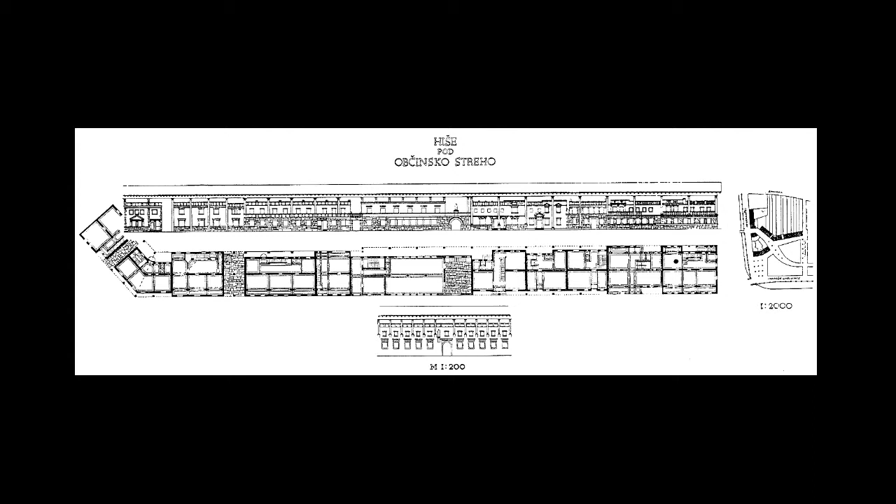He did some very social projects. This is housing under a common roof—not a left-wing project, but a deeply Catholic one, of a city providing a huge roof where people could build their own houses underneath it, a kind of early attempt at social housing, here used by a famous Slovene artist. Slovenia didn't only have Plečnik—there were his students too, because he started the School of Architecture, and some went on to work for Corbusier and later took over the school.

I think this is maybe a little bit a parallel to the people that started the school here. This is Edvard Ravnikar, an architect from the 60s, 70s and 80s, a student of both Plečnik and Corbusier, who basically introduced modernism to Slovenia. This modernism was a softer, already developed modernism, which owed much more influence to people like Aalto than to Corbusian influences.

The political aspects of our existence may change over time, sometimes even drastically, but the architecture, unfortunately or fortunately, is there to stay. So the permanence of architecture is something that also has to be taken into account.

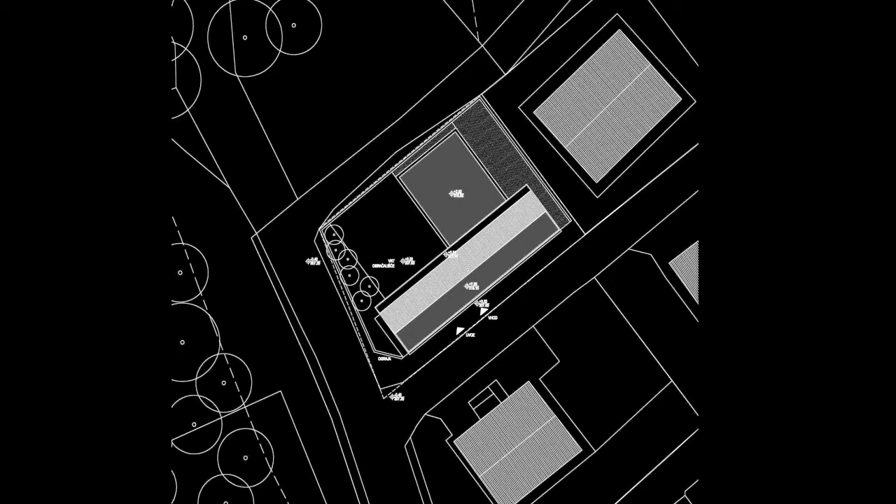Within this context, we tried to create a building that is its own fence on a very small plot of land that enjoys the views but also tries to catch the sun—transforming something expected of you as an architect into something still within the rules of the expected, but bringing out another set of qualities.

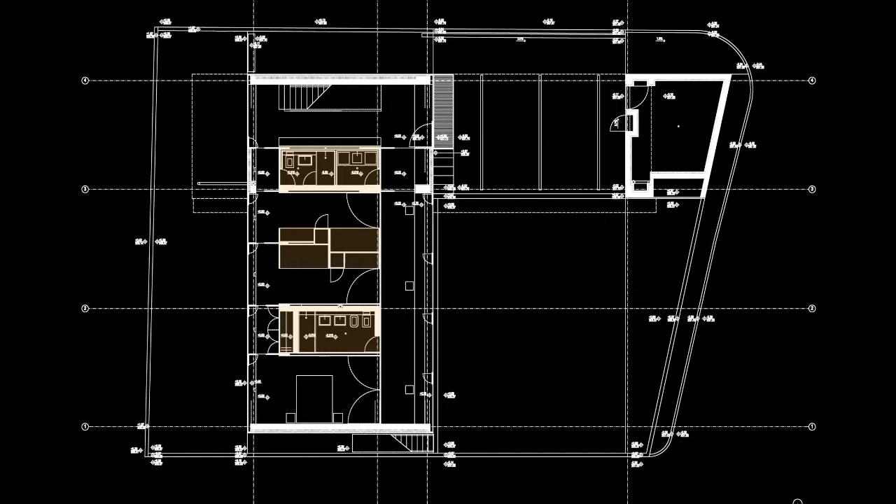We created a living room that works like a periscope, catching the southern sun and then directing the views to the north, lifted on the first floor because our friends commissioning us didn't want a real garden since they always lived in a skyscraper. We designed the ground floor as a bedroom area, extremely small, influenced by the idea of a ryokan, where all the rooms can be packed away in the morning so the whole surface is free for the children to play. The upper floor offers a different sensory and spatial experience, a kind of loft space that opens to the views.

The building is, in fact, a decomposed version of the neighboring buildings, clad in wood, catching the sun on the side with the ugly neighbors while not facing their views, even creating a provisional garage space, and then lifting the garden so you don't need fences, so it can all become one huge working surface for the whole family.

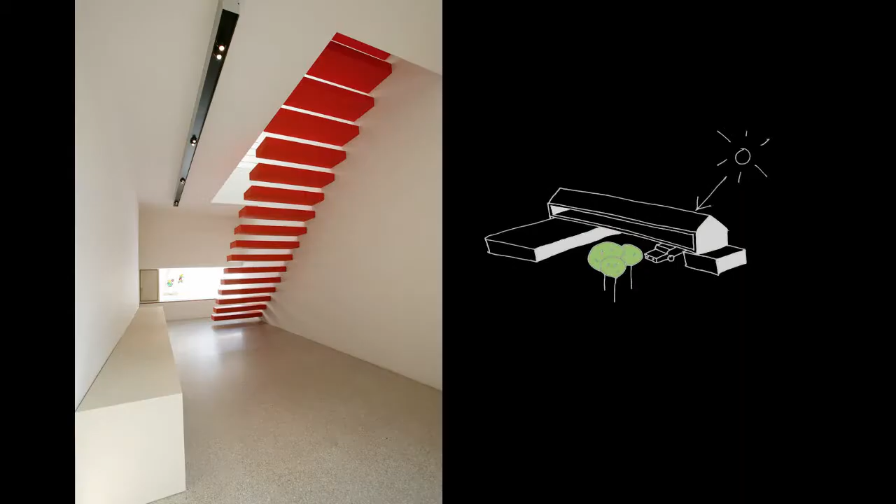A series of doors slides open in the morning to open up the entire ground floor. The staircase is the point where the whole spatial experience of the building shifts into something much more open and wider, more like a parcel of land than a room in itself, facing these views to the outside. The roof of the bedrooms becomes the new garden or terrace of the house.

This was the first project we did, and then over the following 12 years, or really 10 years, we continued developing this approach. This building turned 10 years old this New Year's Eve.

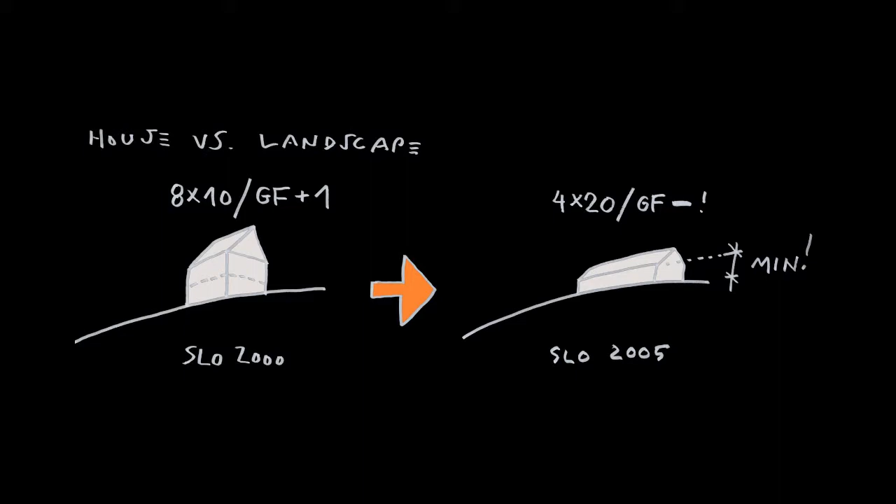We actually did a series of similar experiments, always dealing with the idea, sometimes with the notion of landscape, sometimes with the notion of programs, sometimes with the notion of organizational models of the families, and always trying to address wider issues, like in this case the issue of transforming the expected volume of something that should colonize all of our periphery into something that has to do much more with the idea of buildings integrated into the landscape, used as farm buildings rather than suburban ones. This is a small hill overlooking suburbia of Ljubljana.

It's in this little garden that we have to build the building, and this is something we try to do: we try to transform the landscape while creating a building, so that there will be two conditions - the condition of the patio house at the bottom, carved out of the hill, and the condition of the living room sitting on top of the landscape, overlooking the surroundings.

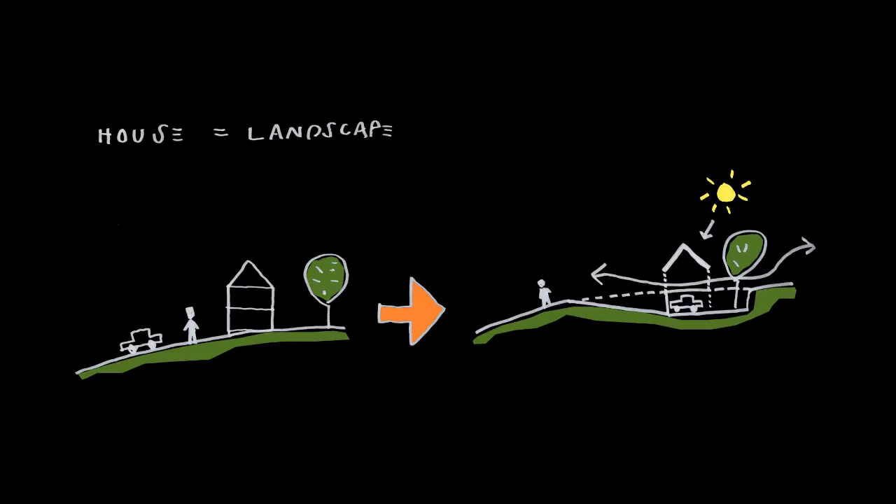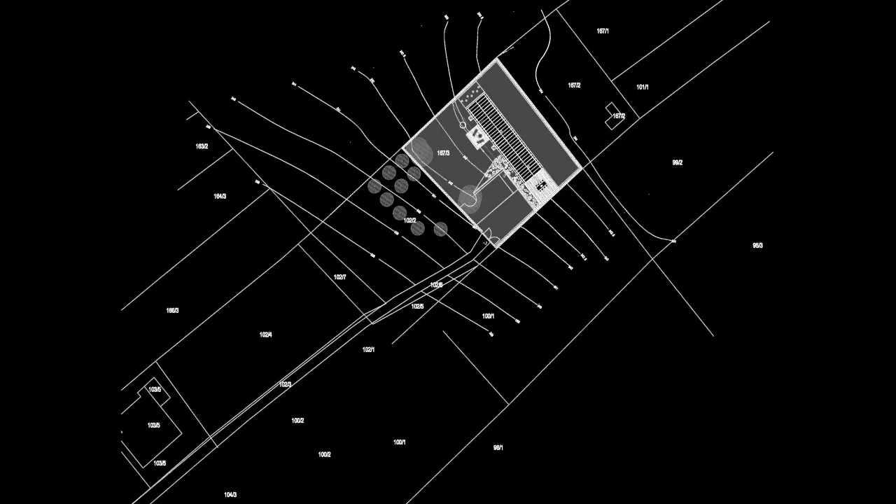In fact, when you look at the site from the air, it looks like nothing has changed, except there is one house which spans edge to edge of the site. But in fact, the bottom is the patio building, and the top floor is completely glazed. I'm showing this building deliberately next to the previous one because they're in fact a pair.

The materiality and the idea of condensing all of the technological layers of the building, much like in a tent, into just one surface, is something that we tried to achieve.

So this is actually maybe 10 or 15 minutes from Ljubljana. In some ways, sometimes you can deal with the place - like in this case, I think we dealt a lot with the idea of landscape, and the idea of use and abuse of landscape. Sometimes there is no such thing - sometimes, especially these peripheral conditions, are kind of completely bizarrely characterless, so there's nothing in fact to take into your project.

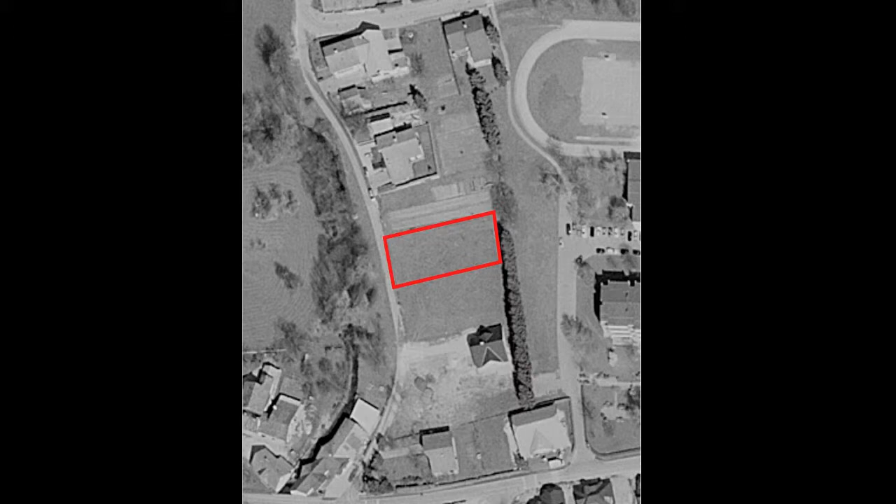This is one such occasion - 25 kilometers from Ljubljana. The sprawl that I showed you starts in Ljubljana and continues for another 30 kilometers. This is why I say we never really have a center and periphery, just maybe a continuous center, but I think also a continuous periphery. And here we have a site which is just 55 by 20 meters.

That's it. So what do you deal with? It's just a flat piece of grass. What can be constructed on this?

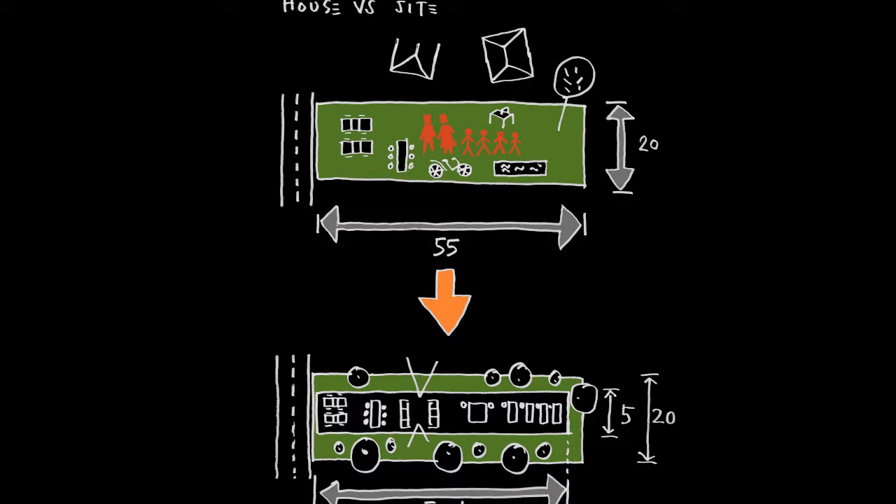But we also have a family - in this case, friends of ours who didn't have children for 20 years, and all of a sudden, through miracles of science, ended up having four children over two years. So these four children are, I think, much more important context, because the house is a celebration of this life. Otherwise you don't build a house - the house is about life. So it's much more of a context than the actual site.

And this is the building. Once we finished it, we were accused of doing a car showroom, a fitness building, and then finally, these people actually live there.

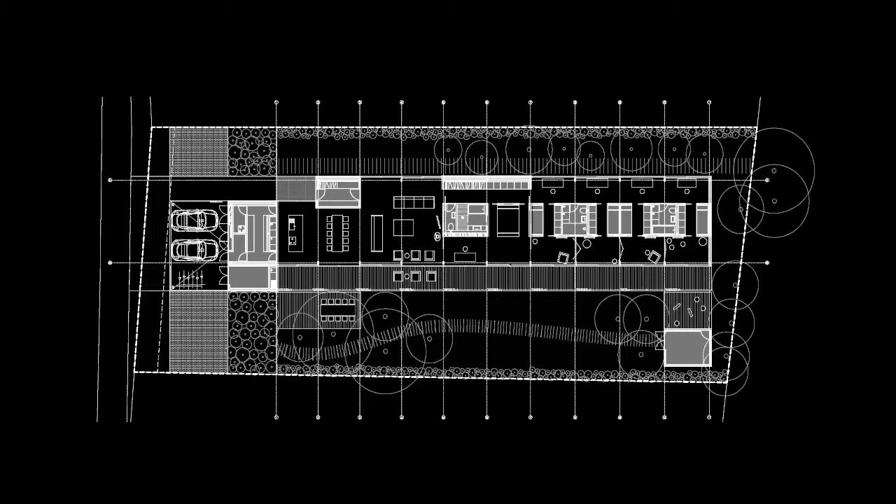The building is 50 meters long, the size of the site, and 5 meters wide. It's a continuous space of living room, parents' bedroom, and 4 children's bedrooms, where each space retains a small privacy, like on a boat, but also opens up to a common communal space, so that through glass elevations we can actually take over the entire site.

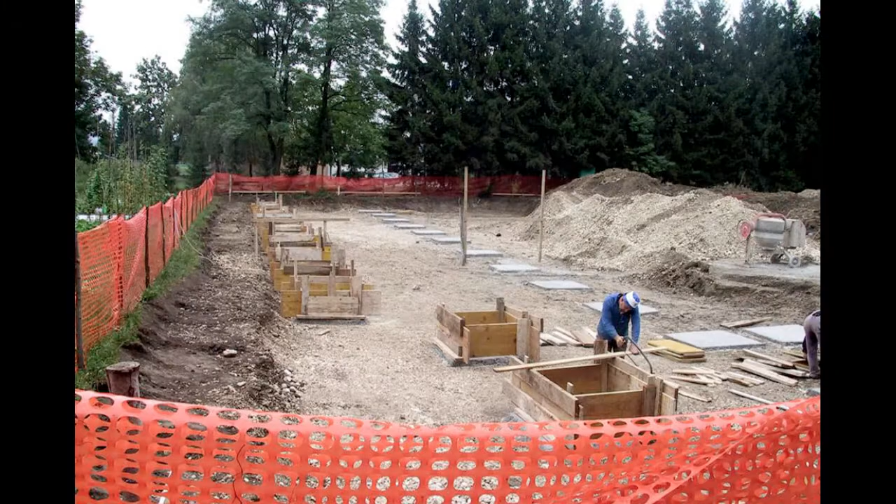When you do a building, the building reflects the idea. The entire site is the building site. The construction has huge cantilevers because it's a southern elevation, so it works very well with climatic control, where we can actually use very ordinary glass.

I'm going to just enter the building very quickly.

The mother can sit at the kitchen table, and there's a series of sliding doors, which you didn't see on the plans, that can slide in and out and connect all the spaces of the house. So these four small daughters and the mother can in fact live their life together during the day. In a sense, the building gets constructed and reconstructed every day, depending on the social conditions the family chooses to enact.

Now the children are a bit bigger, as this is an old project, so I think these sliding walls don't move that much anymore.

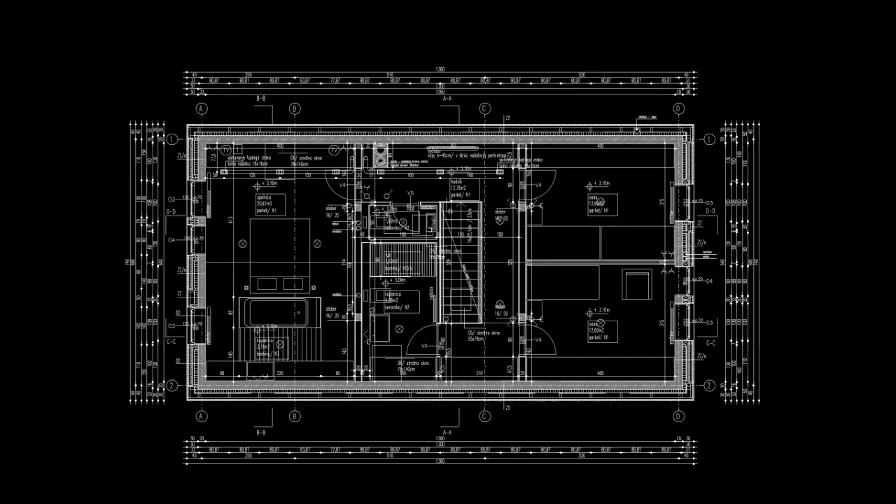The plan, which is very simple, has some bedrooms on top and a living room at the bottom. The house, once uninhabited, looks a bit like a hay rack or a service building in the field.

Once inhabited, it opens up and contains all the exterior spaces of the building. So it basically does not consume any of the landscape around it, it just exists on it and opens up, and can be used for the weekend and then closed after that. In a sense, the nature of this program—the weekend house—is also peripheral in relation to how our lives are happening today.

The backside of the building has this terrace, which is included into the volume of the building.

Another peripheral location—I'll try to end with this one—is something we did in Croatia a few years back, again for friends of ours, a weekend house again, something only used for 2 or 3 months a year. It's on the island of Silba, in the middle of the island, but still only 2 minutes from the sea, where our friends bought this wonderful old house.

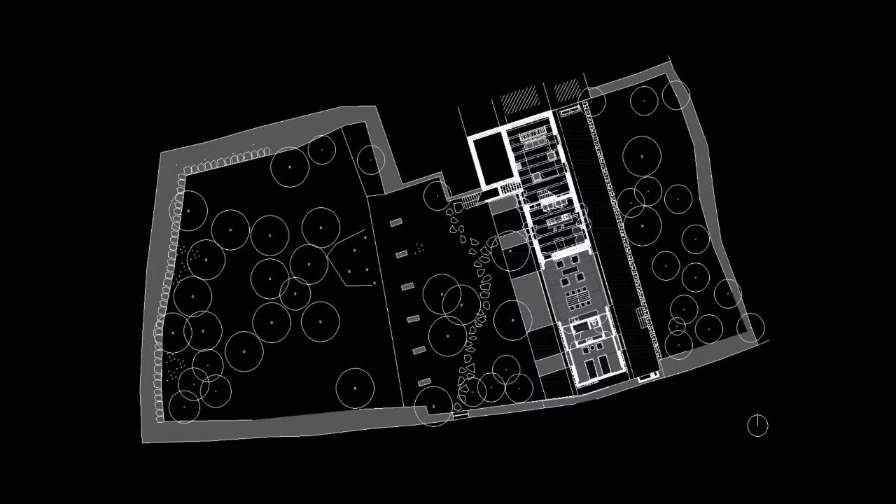It was a captain's house, a 19th century captain's house, completely falling apart, which we had to renovate, and to which we added a pavilion on the side.

Why did we add anything to a building which is already good in itself? Because the idea of habitation in the 19th century was not the idea of habitation we have today. Today, when you're on the coast, you're having your free time and you want to be outside. The people who built this house in the 19th century felt the house was a protected layer for the family, so they have no terraces, no outside spaces—it's basically just a box.

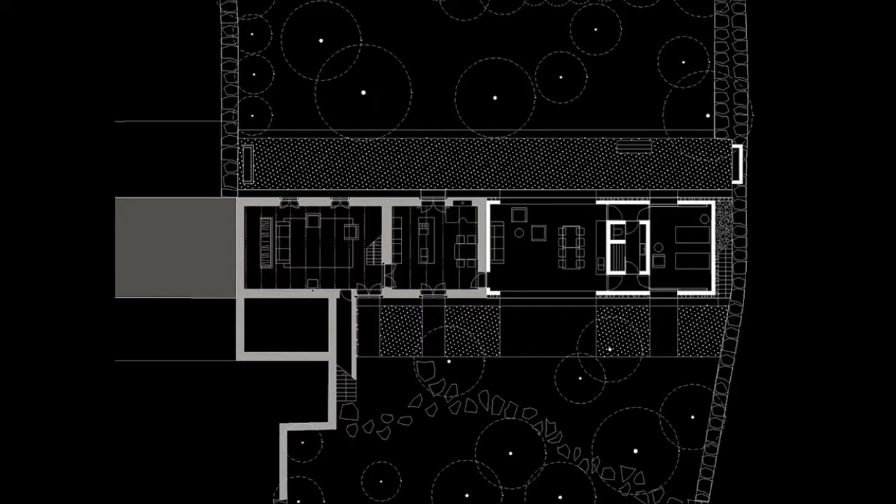So we cleaned the entire ruin. We had to repair it, but in many ways it's completely beyond repair. We added a completely different construction in concrete, which we polished—hand-polished white concrete—then clad it with a different way of layering the exact same stones found on the site.

So in a sense, the two constructions—one of the old house, basically a cleaned facade filled in with cement, and the other a drywall made of the exact same material but put against the building—stimulate the idea of ephemerality, because only the surrounding walls are built in this dry stone. The interior is all solid cast concrete and polished, so you have a different feeling once you enter.

The building doesn't have rooms—it's just a roof, just a space, with a small guest sleeping bedroom on the side. It's just a space to sit and enjoy the very old garden that surrounds the entire building.

The guest bedroom's windows and doors were sized to allow you to completely have the open air feeling within this construction.

These two different modes of using the exact same material—one traditional, where you respectfully repair it, and one new, where you take something that exists there, because the surrounding wall at the back is made in the same dry stone, and construct with that.

Like the people I showed, the house is also functional like that. They are all different—they don't have to be the same, they don't have to belong to the same sensory universe. But they have to belong to the same kind of attitude and approach.